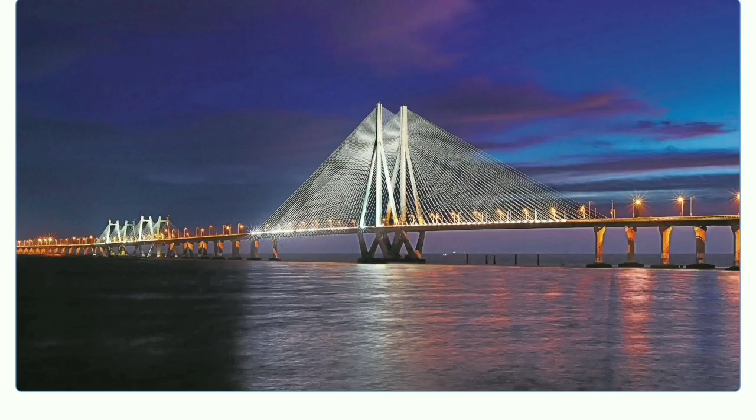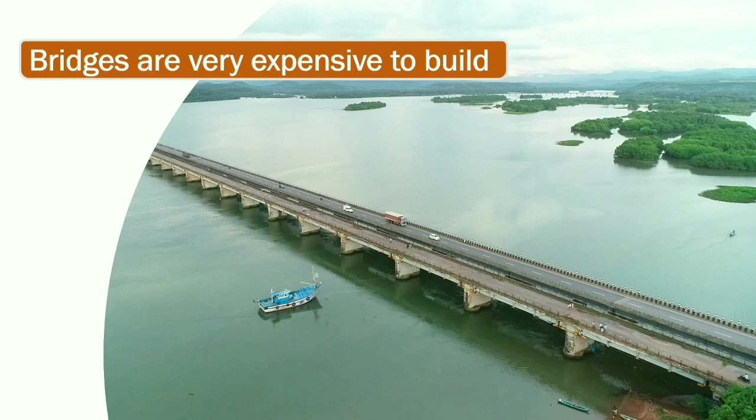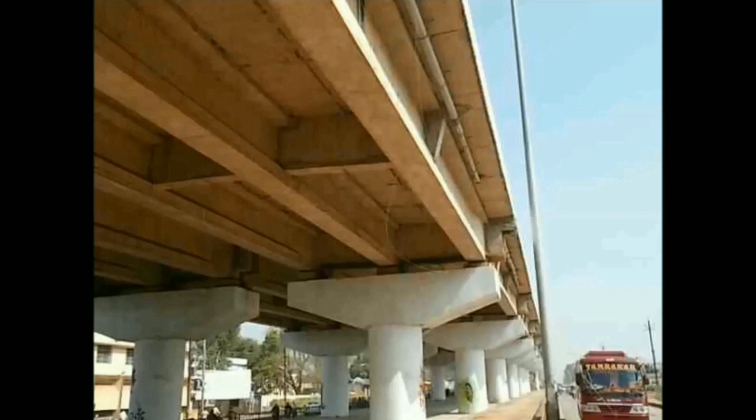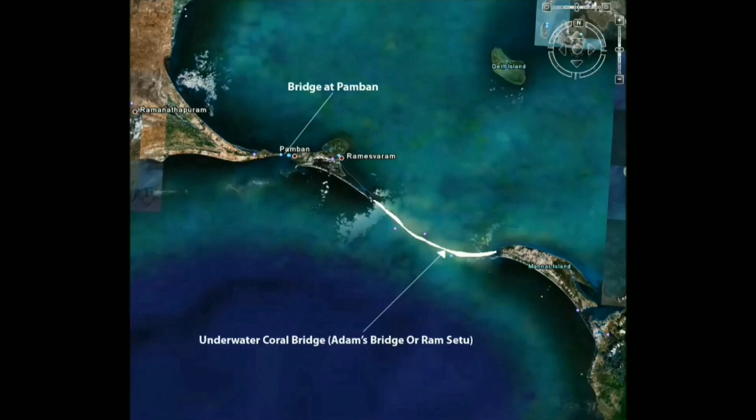Bridges connect two communities. They connect residential and industrial areas. They enhance the landscape of the city. BMS the world over was initiated due to the collapse of Silver Bridge in USA. IDDC Engineers is proud to present Indian Bridge Management System. Bridges help us overcome obstacles and cross them. Bridges are important to our transport and economic growth. Historically, India boasts one of the oldest bridges. NASA also confirms the reminiscence of such a man-made bridge between India and Sri Lanka dating 17.5 lakh years ago.

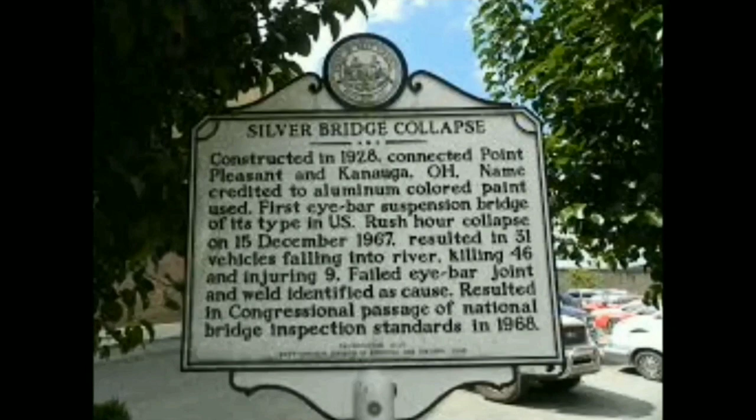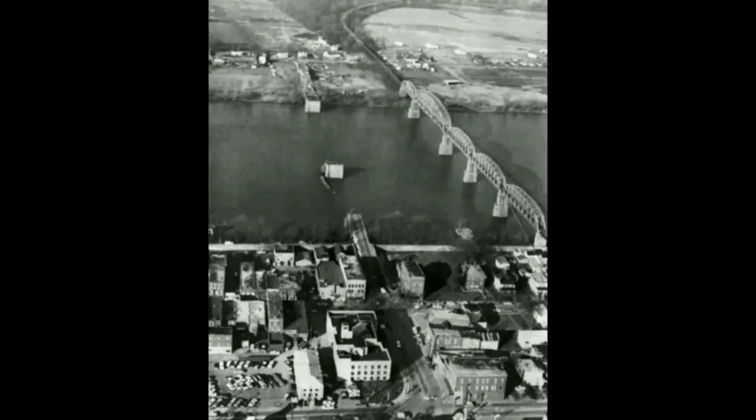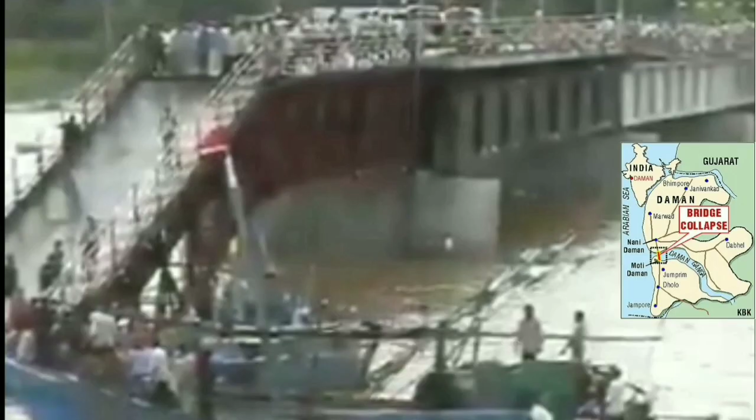Bridge management system concept was initiated after the failure of Silver Bridge in USA in 1967, which resulted in the death of 46 people. Immediately, USA adopted National Bridge Inspection Standards, which formed the basis of all bridge management systems the world over. Indian Bridge Management System, or in short IBMS, owes its initial conceptualization also to the tragic loss of 26 young kids. Conceptualization started in 2003 post Daman-Ganga Bridge collapse in which these 26 school children died. It was a tragic incident.

IBMS means Indian Bridge Management System. Post-collapse of Daman-Ganga Bridge in 2003, research on IBMS started and continued till 2015. MORTH appointed IDDC engineers to develop and implement IBMS system in June. IDDC commissioned IBMS in September 2015. Field consultants were given tablet software to capture data and upload on the IBMS. IBMS is the first fully digitized system. IBMS becomes the largest database of bridges owned by a single owner with data for over 172,000 structures.

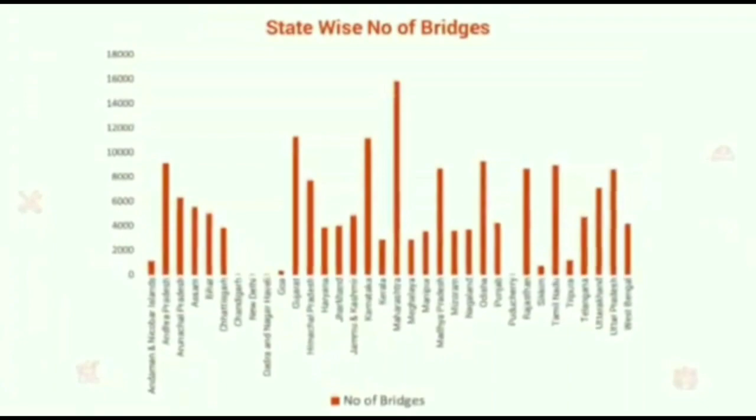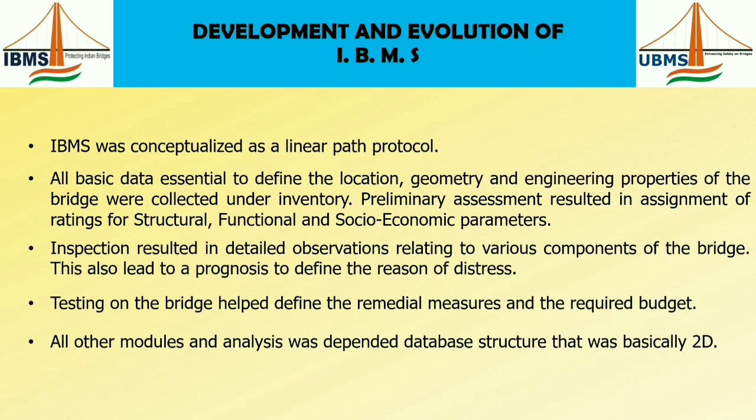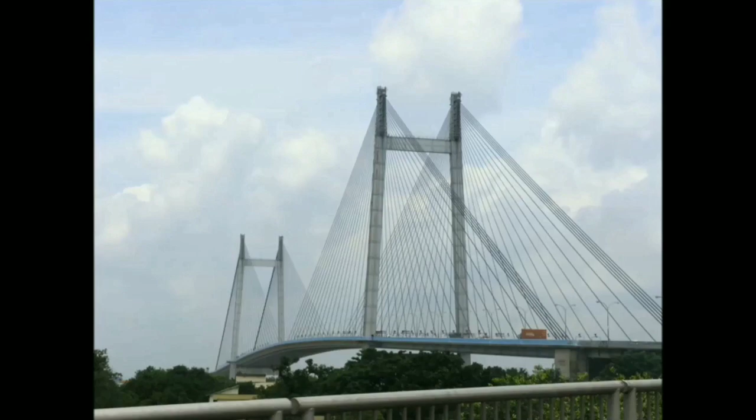And we conceptualized IBMS as a linear path protocol. All basic data were collected under inventory. The inspection resulted in detailed observation. Testing on the bridge helped us to define the remedial measure and the required budget. All other modules and analysis were dependent on the database structure that was basically two-dimensional.

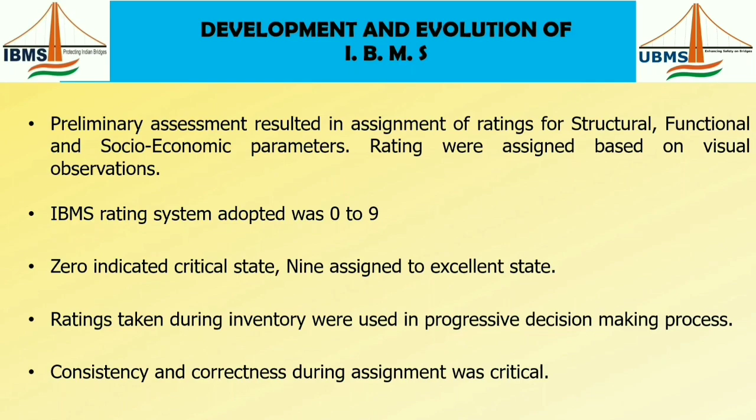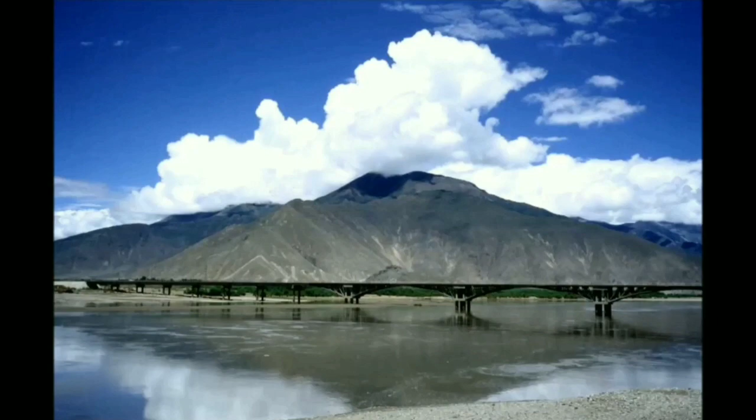Preliminary assessment resulted in assignment of ratings for structural, functional, and socioeconomic parameters. Ratings were assigned based on visual observations only. The rating system that we adopted was from 0 to 9. 0 indicated critical state and 9 indicated excellent state. These were used in progressive decision-making process. Because they were used in progressive decision-making process, consistency and correctness during assignment was critical.

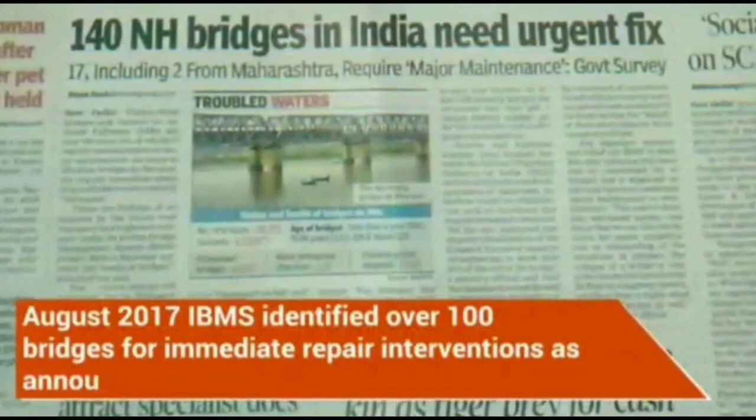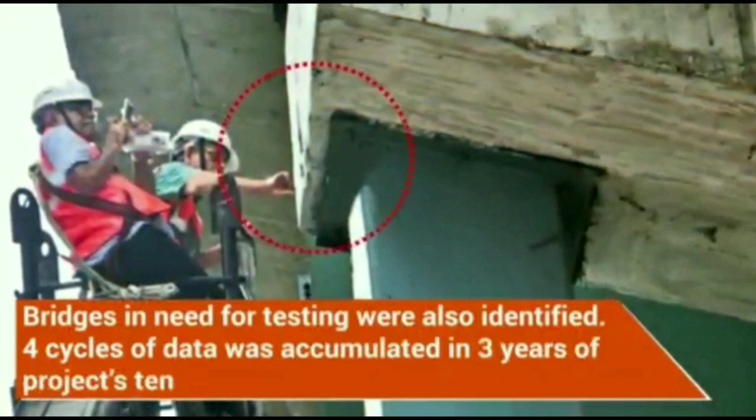In October 2016, Honorable Minister Nitin Gadkari dedicated IBMS to the nation at the first international conference IBMS 2016. In August 2017, IBMS identified over 100 bridges for immediate repair interventions as announced by Honorable Minister in the Parliament. Bridges in need of testing were also identified. 4 cycles of data were accumulated in 3 years of the project's tenure. Data from 4 cycles can be used to analyze the deterioration occurring in the bridges and formulation of predictive tools and risk index.

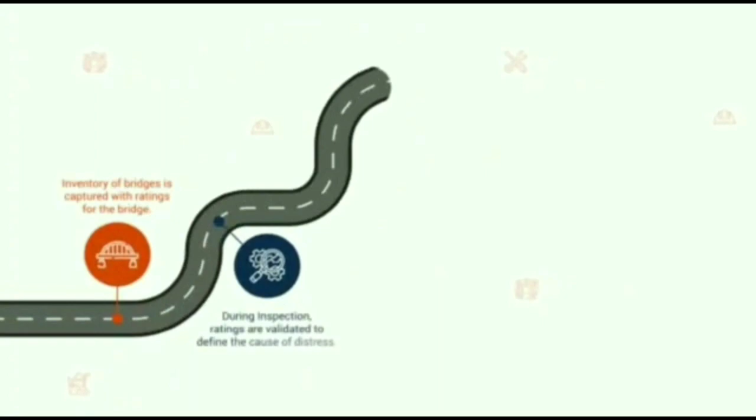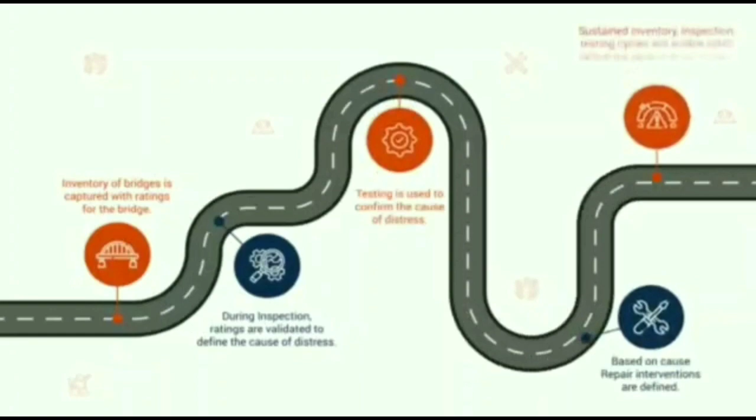Inventory of bridges is captured with ratings for the bridge. During inspection, ratings are validated to define the cause of distress. Testing is used to confirm the cause of distress. Based on cause, repair interventions are defined. Sustained inventory, inspection, testing cycles will enable IBMS to define the deterioration models and risk index.

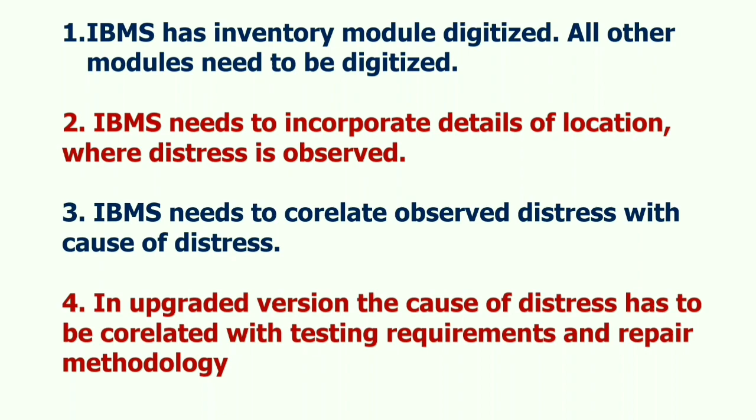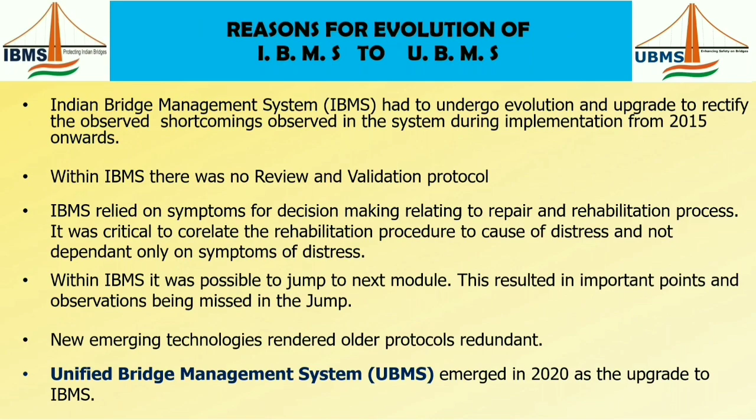We realized that within the IBMS linear protocol, there was no review and validation protocol. IBMS was dependent on symptoms for decision making. Within IBMS, it was possible to jump to the next module. This resulted in missing important information, and the emerging technologies rendered older protocols redundant. What emerged out of the upgrade was called a unified bridge management system, UBMS.

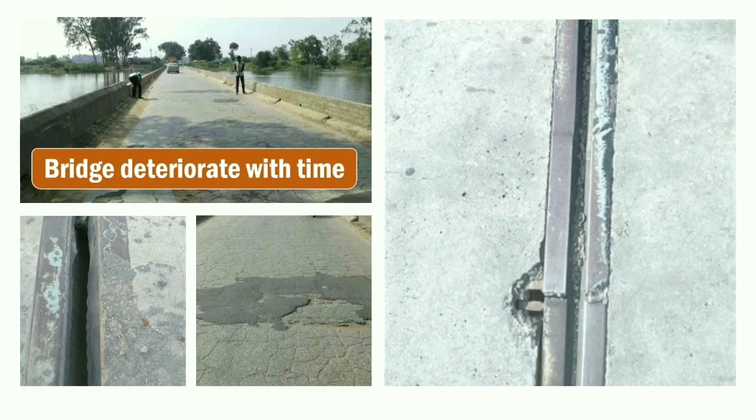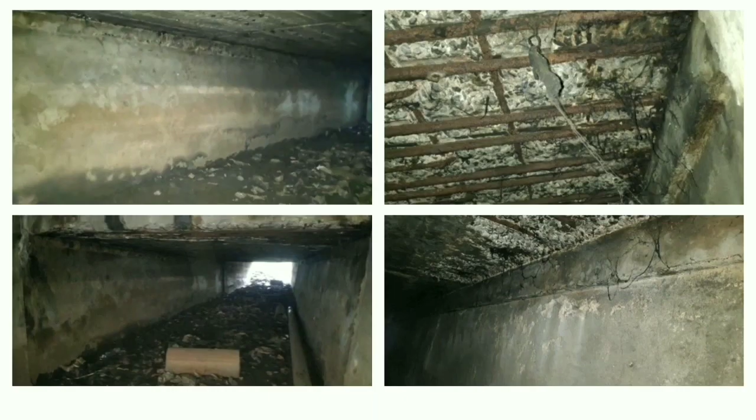One must realize that bridges, like all structures, deteriorate with time. Our system needs to mature with ongoing research and focus on the final aim to prevent such loss of people that occurs due to collapse. UBMS is an intermediate step in this ongoing research. So what is UBMS?

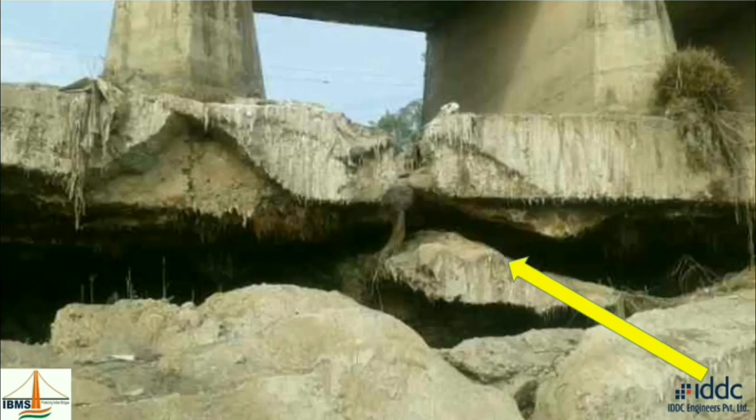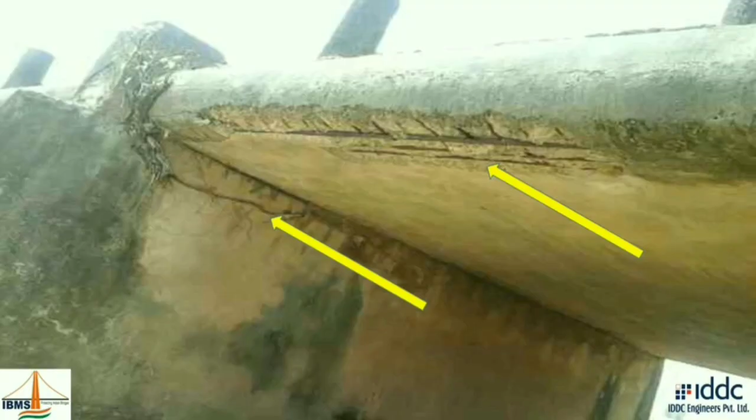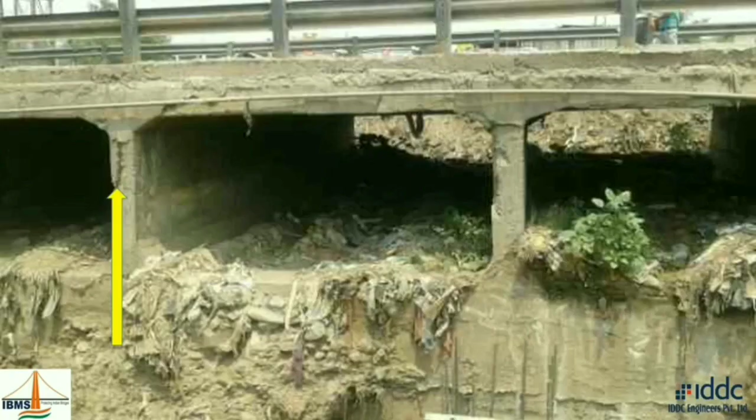Unified Bridge Management System, or UBMS in short, is the upgraded version of IBMS. UBMS has the following 9 modules: inventory, inspection, testing, repair, analysis, management module, which also has a risk analysis and priority functionality, administration, report module, and dashboard for summary statement. All the modules of UBMS are digitized, and if required, all decision making can be implemented by UBMS.

The software essentially has 2 parts. The heart of the system is the server software, which resides on the cloud server. The software which communicates with the server software is the tablet application, which resides on the tablet or mobile.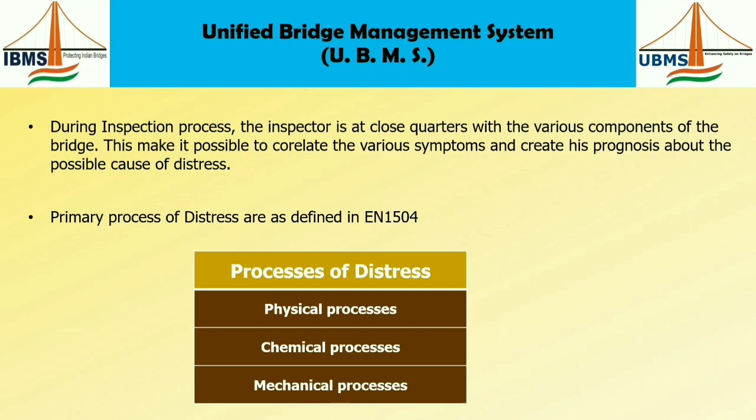In the inspection process, the inspector is at close quarters with various components, making it possible to correlate various symptoms and create his prognosis about the possible cause of distress. This is similar to when you go to a doctor: the family doctor makes his prognosis and then sends you one step forward. EN 1504, published in Europe, defined 3 processes of distress. These 3 processes were physical processes, chemical processes, and mechanical processes.

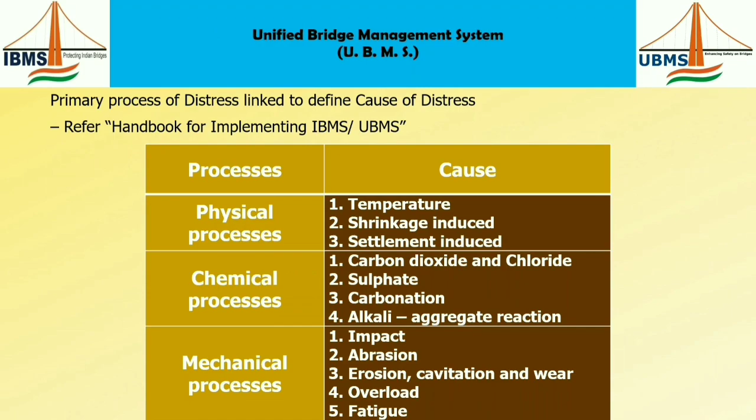Further, in our handbook for implementing IBMS/UBMS, we defined 11 causes as sub-processes or causes within the physical, chemical, and mechanical processes. Based on the prognosis of deterioration, the inspector assigns ratings from 0 to 9 for various sub-processes, which results in a matrix called the cause matrix.

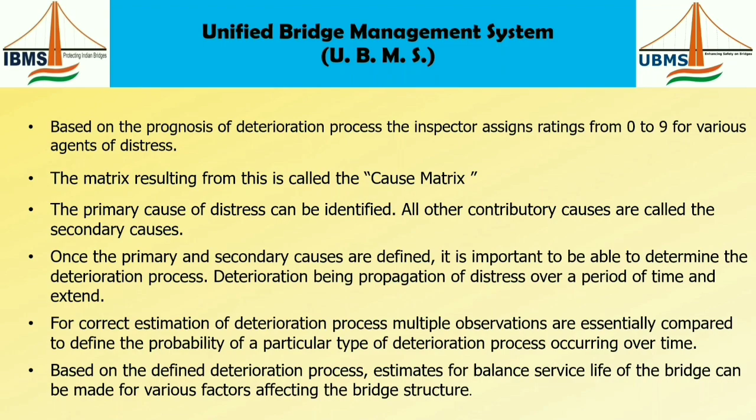Once the primary and secondary causes are defined, we need to determine the deterioration process. For correct estimation of the deterioration process, multiple observations are essentially compared to define the probability of a particular type of deterioration process occurring over a period of time. This leads to estimation of balance service life of the bridge, which can be made for various factors affecting the bridge structure.

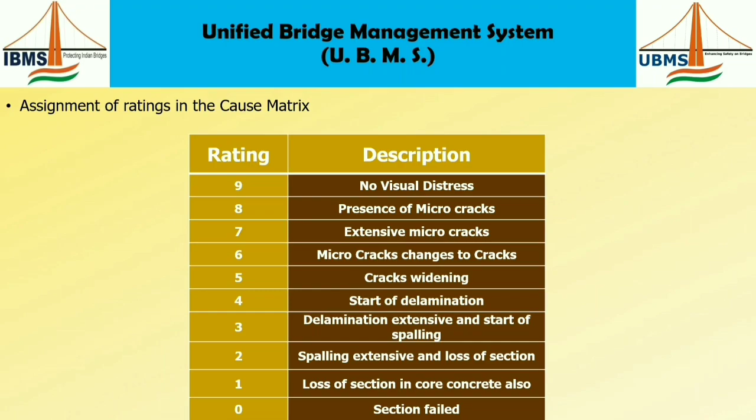Once all the observations are completed, the bridge inspector has to validate the ratings assigned to the bridge component during the bridge inventory process. This validation, once complete, will automatically override the rating values in the bridge inventory of the database when the inspection data is synchronized on the national server. Such a validation process eliminates the risk of using wrong input during the decision-making process.

During inspection, details of damage within each span are noted for each element in all four components, and measurements are noted for such damage observed. This enables evaluation of quantities essential for bill of quantities during repair estimation. During damage observation, a judgmental prognosis is created as to the reason of the damage in the form of a cause matrix by assigning rating numbers to all 11 causes of damage.

Furthermore, closer photographs are uploaded on the system during the bridge inspection process. Ideally, the photographs for various damage indicating the extent and type of damage need to be captured as illustrations of the damage observed on that particular date. Comparison of such photographs enables the bridge inspector to decide about the severity of damage and its propagation speed.

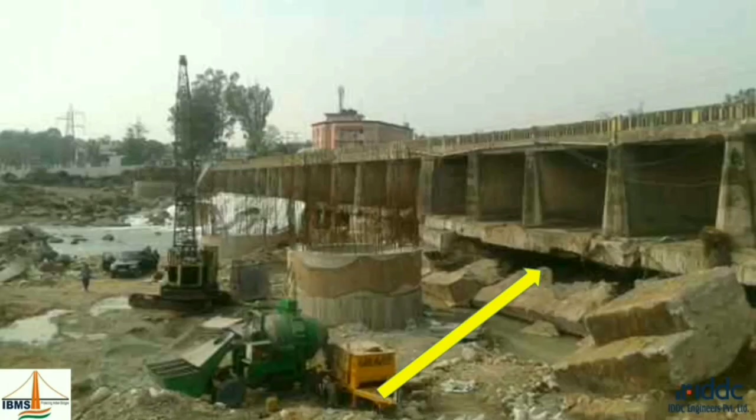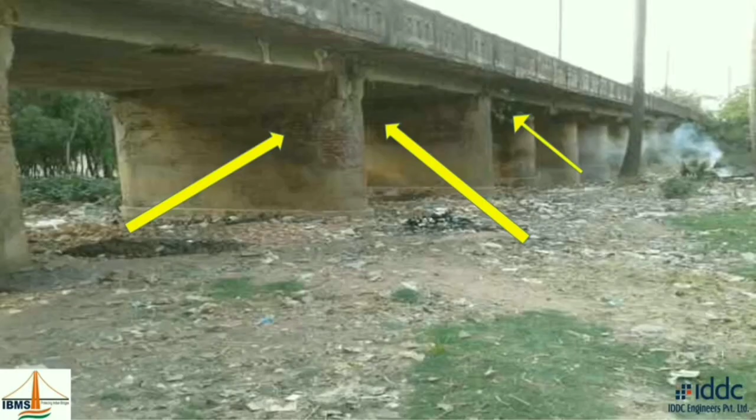The inspection process is very critical in all decision-making processes associated with the system and should be undertaken by a properly trained, experienced bridge inspector. Once data from the bridge inspection is saved properly on the tablet, the user is prompted to upload the same to the staging server. On the staging server, it is validated and then synchronized to the national servers, similar to the bridge inventory data.

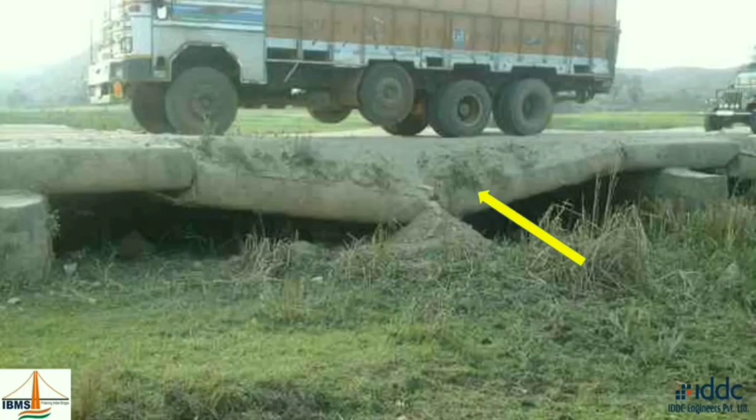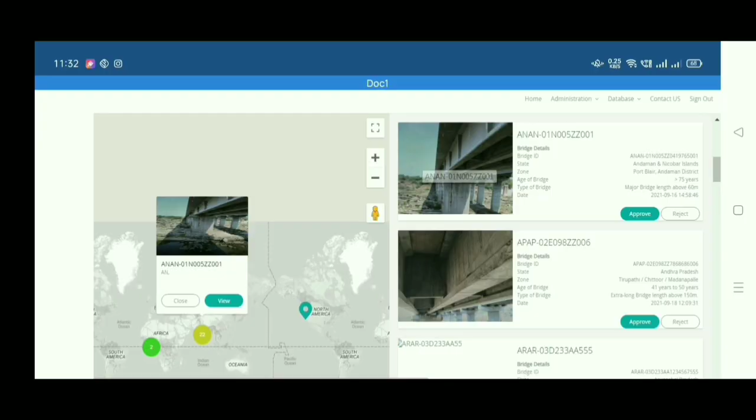On the national server, the decision-making process is automatically started based on the prognosis of the cause of distress. Testing essential for confirming the prognosis is shortlisted and the bridge is assigned to testing, indicating the span to be tested and the type of test to be conducted. The bridge is now assigned by the user for testing. Evaluation of balance service life estimates the risk involved.

Structural behavior is based on the location of the loading and the reaction of this loading to various other factors, with the discontinuity in the section subjected to loading. Location of such discontinuity also affects the response of the section. One has to realize that the behavior of the structure is dependent on the geometry and various other conditions, including the geometrical location of the discontinuity.

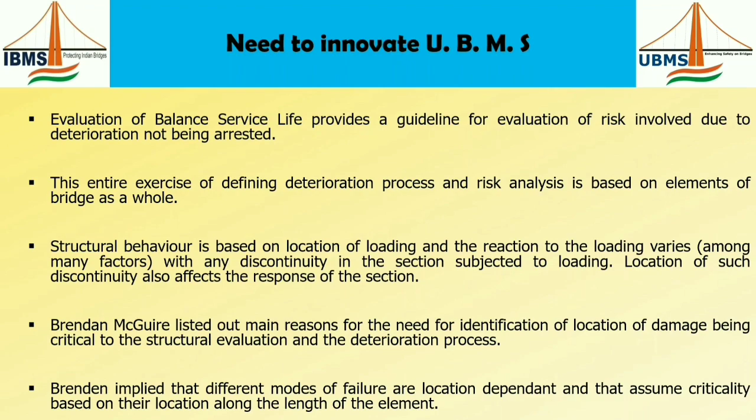Location of the damage is critical to structural evaluation and determination of the deterioration process. Modes of failure are also location dependent. It could also affect the load capacity evaluation of the member along the length of the element. None of the existing bridge management systems, including UBMS, is able to provide accurate digitized data relating to the location of the damage or distress.

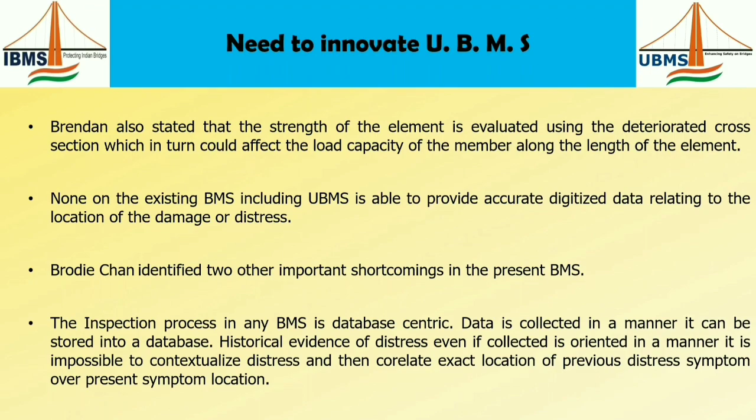They have sufficient data regarding the cause of the distress and other related factors to enable deterioration modeling to be done. But the critical aspect of the location of the damage or distress is a gray area. Research is ongoing. It is impossible to correlate the exact location of previous distress symptoms with present symptom location because the data is based on a database.

This hampers the correct evaluation of the deterioration model. This results in the engineer's inability to correctly evaluate the reduction in load capacity, and these shortcomings of bridge management are being sought to be overcome using various presently available technologies and ongoing research.